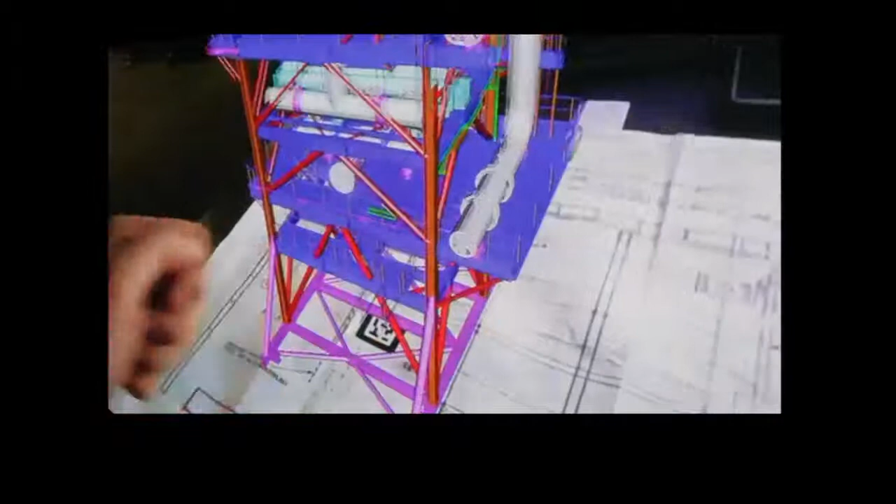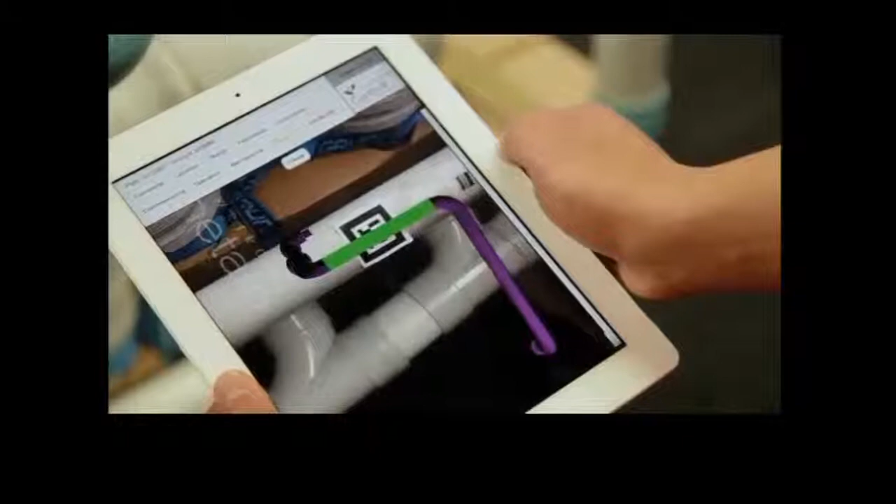It's difficult to conceive the scale and complexity of construction projects in the oil and gas sector. The challenges involved in managing such mega projects are enormous. Initiated by Woodside, Project EXPO uses leading-edge technology to improve productivity and performance in LNG construction. Internationally recognized leader in augmented reality, Professor Xiangyu Wang and his team Lei Ho, Matthew Lavender and Ying Wang have focused on getting the right information to the right people at the right time to enable significant productivity gains. Using augmented reality as an enabling platform, they developed a suite of powerful integrated software tools aimed at improving efficiencies at every stage of a project's life cycle. Their tabletop modelling tool overlays a 3D model of a structure onto standard 2D shop drawing plans. Moving the camera allows you to move in, out and around the model. You can also scale the model up to life size and even isolate layers of the structure. Simply by scanning a marker on a component, the In Situ Asset Management tool displays a 3D model of the component and where it fits in the construction path. Depending on your role, you can also access additional information, including specifications, where it was made, when it was delivered, and when it was to be installed. The tool can also locate components by identifying where you are and where the object is in relation to you.

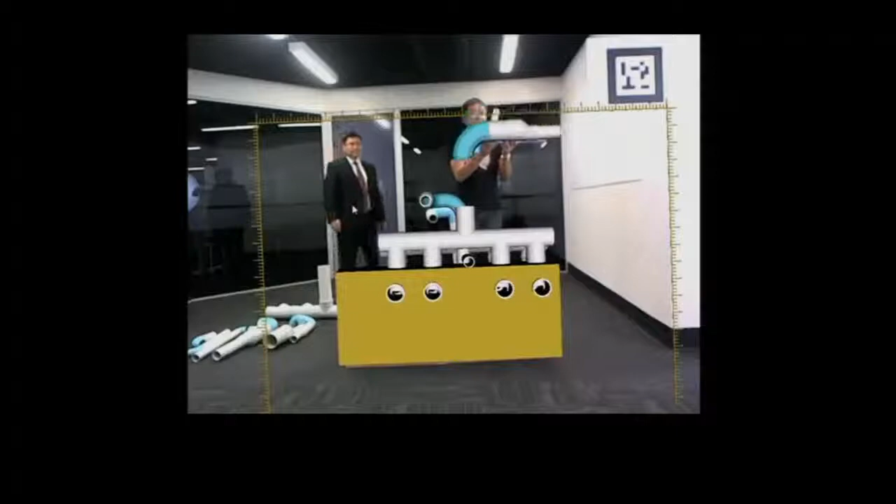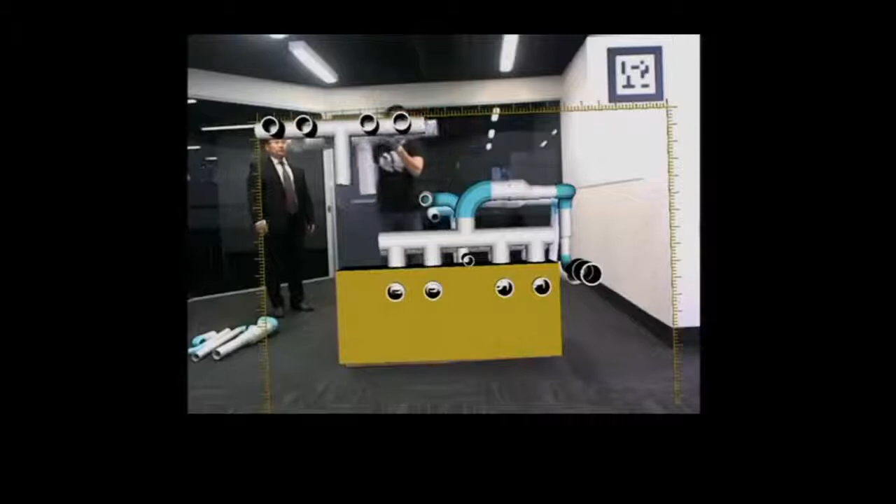The assembly tool locates you in a physical space and then overlays a 3D model of what needs to be assembled in that space. It shows what the component looks like and where it goes, and provides a step-by-step animation of the exact assembly sequence. This tool directly links the virtual world to the real world.

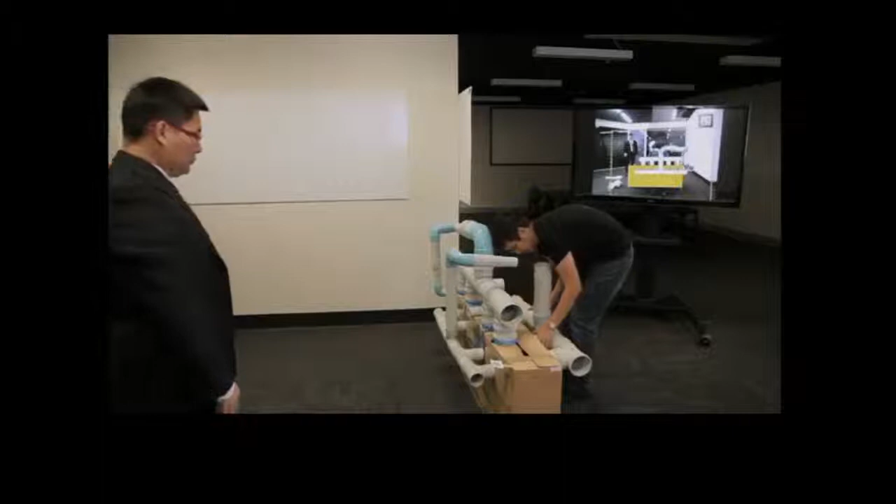Our innovation takes context-aware computing to the next level. Although developed with Woodside for the oil and gas sector, our innovation can be readily applied to mega projects in other sectors such as mining, health and transport infrastructure.

As you can see, we are actually doing a lot of significant research with Woodside and other industry organizations. But for confidentiality reasons, I cannot go beyond what is shown in this video.

But there's a series of papers which is going to be published soon, from where you can actually learn more about that. And I would like to spend a couple of minutes to introduce the Australasian Joint Research Centre for BIM. It's actually a research centre owned by university, established relatively recently.

This is a university research center, so it's different from industry organization sponsored, just like aceBIM - totally different visions. We are more working on the research part of it.

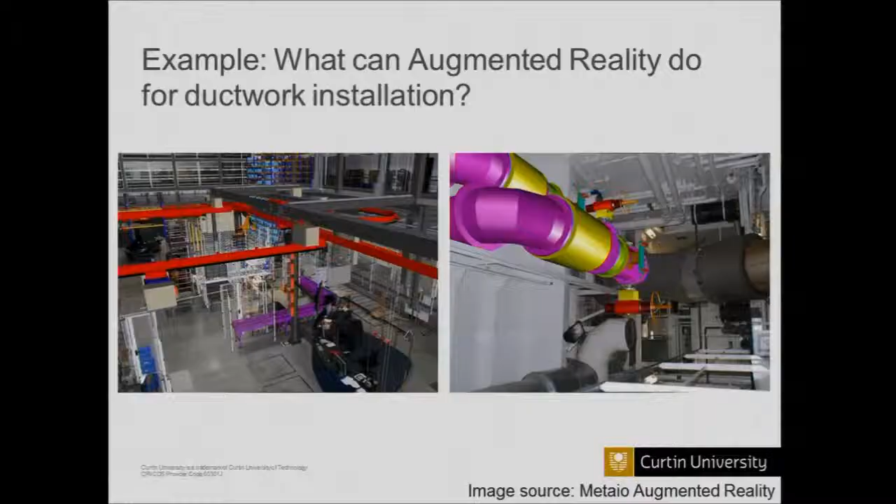But what if we use augmented reality? Then you end up with something like this. You get an overview of the factory and impose the virtual piping and other elements onto it. From here you can see the first-person perspective - the piping will be the same size, orientation, materials and textures as what you need to build. Basically, what you see is what you need to build, and you don't have to go back to 2D menus, 2D drawings, or 3D models anymore. This becomes a paperless setup.

Here's another example, which I don't think has been realized yet - it's called the augmented window. It's more like an iPad-based device, though it's not actually an iPad, it's still under development. Through this you can see information - for example, whether somebody on the 8th floor is in the office at the moment or not.

I'd like to bring this up again - visualization is key, but user-friendliness is very important. Look at why the iPad and iPhone are so popular - because of haptic touch. Flipping through pictures and photos is very easy compared to selecting a bunch of pictures in a browser-based environment.

The same idea applies here - we're trying to see how BIM can be categorized into different levels and delivered to the right persons through augmented reality and other visualization methods.

Augmented reality is just a way of presenting things, but behind the scenes you also need tracking and sensing technologies - for example, RFID, barcode, and GPS, that sort of thing.

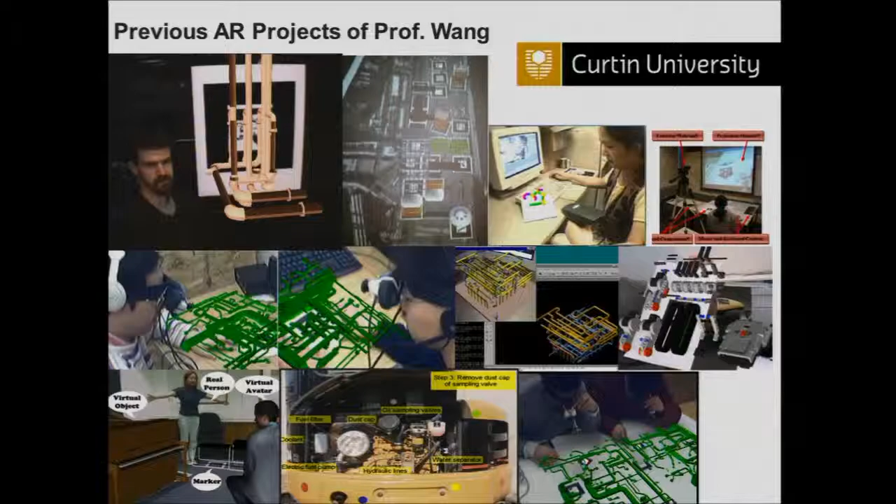Location awareness basically means how the location can be interpreted automatically, then indicated to the system, which responds accordingly - for example, presenting the right information to the right person.

It's all about interaction, integration, and interface. Interaction means how you communicate with computer, machine, and information. Integration means how you integrate the real environment with the virtual, how you integrate information with the workpiece you're dealing with - for example, a pipe or concrete slab. Interface is about how user-friendly your system is. No matter how fancy the technology, if it's not user-friendly enough, nobody's going to use it.

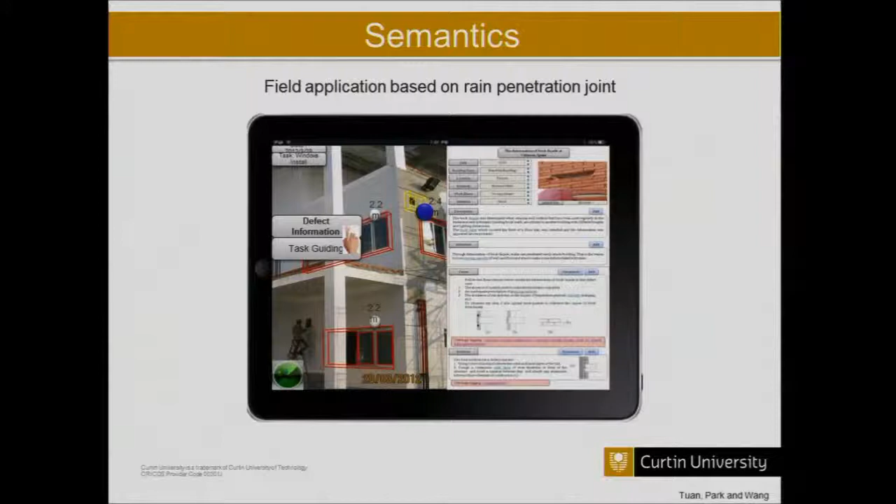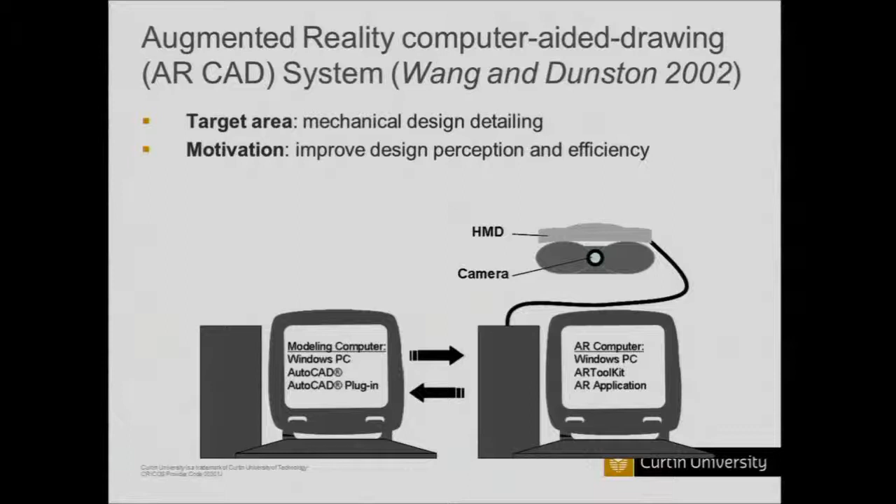This is one of the very early prototypes that I did with my PhD advisor, over 10 years ago now. This is about using augmented reality for what's called the AR-CAD system.

Basically you model things in AutoCAD, and then you click a button, and it will send it to augmented reality, so you can review the pipe in the augmented reality environment.

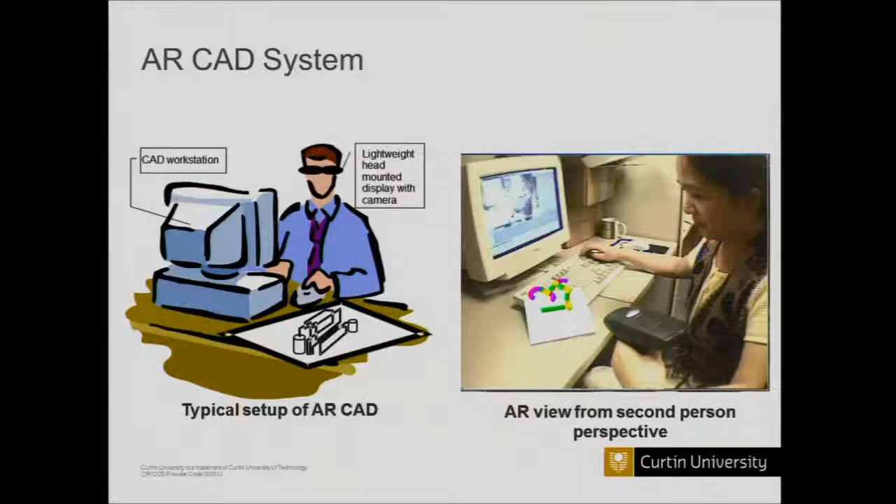Basically what this shows is, through the goggle glass, you can rotate the tracking marker, and there's a virtual pipe that looks like it's glued onto it, and then you rotate it 90 degrees, and the pipe rotates as well.

So you can examine the different angles of the pipe for design review purposes. And this is the AutoCAD environment sending it to augmented reality, so for a very complicated piping system, you can easily recognize and examine problems in it.

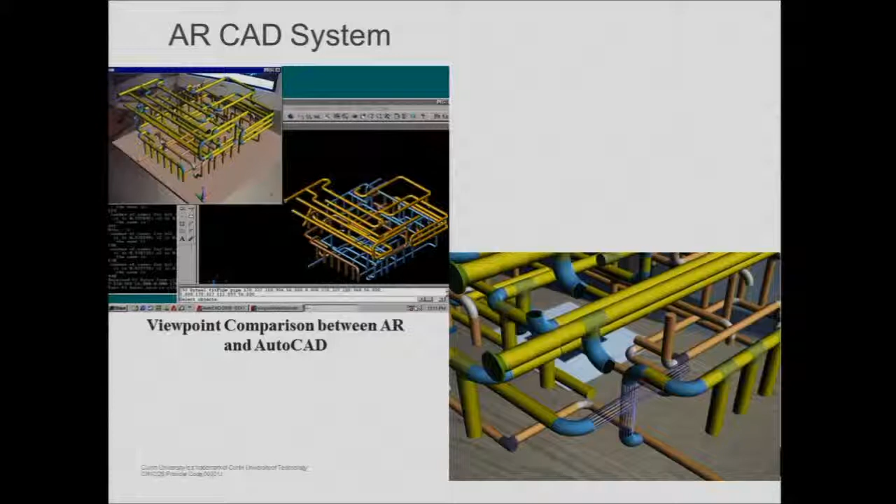I'm going to skip these technical details. We did an experiment comparing ARCAD with AutoCAD, and the conclusion is it's a very worthwhile viewer assistant tool to help identify interferences as compared to AutoCAD.

And then we thought about maybe we should bring ARCAD to the next level to support a face-to-face system for collaboration. This was back in 2005, looking at how AR can improve and change the way people collaborate in design review.

And this is the setup: two people wearing the goggles, and they can see the same complicated design, and they can collaboratively communicate with each other using this tracking ball, and find design errors.

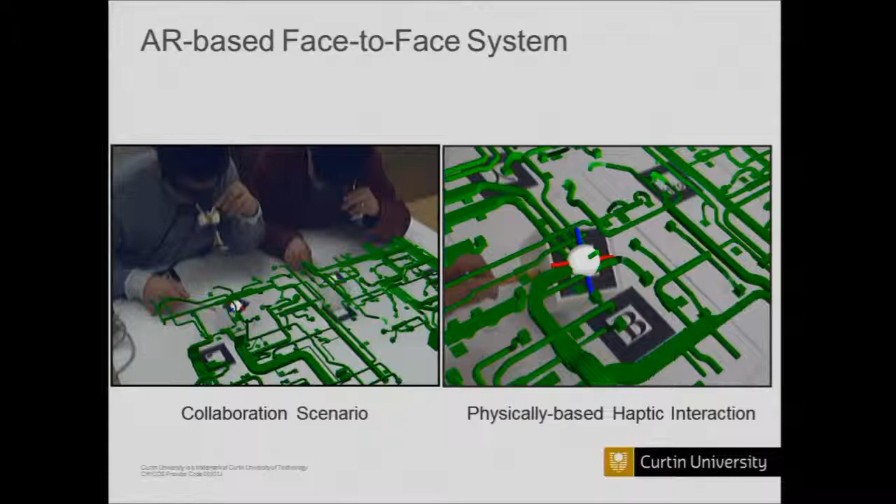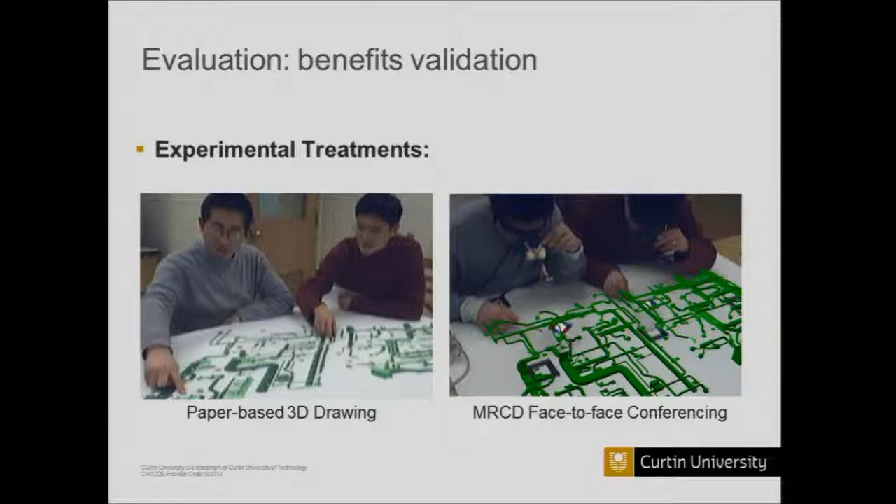And then we did an experiment to compare the paper-based 3D drawing, which was the state of the art at that moment, with the AR, and we found the benefits. The paper drawing consumed much more time than the AR would, and the finding of the difference is significant.

And we also looked at the NASA task workload rating index to look at how user-friendly the AR system is, and it turns out to be very user-friendly.

Some questionnaires were done, concluding that the AR system can overall better facilitate design, collaboration, and problem solving. For this particular experiment, 64% of time was saved as compared to face-to-face paper drawing tracking.

And then the next step from there was to take AR to the distributed collaboration level, to look at how people in two different geographical locations can collaborate.

And this is the AR setup, and we chose the NavisWorks as the benchmark for comparison. And then we found augmented reality can take much less time as compared to the NavisWorks in design review.

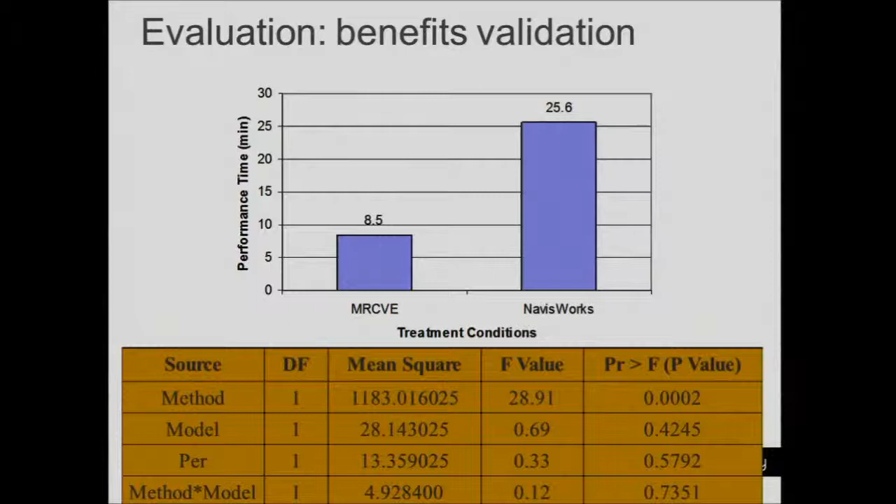Remotely in collaboration, and again, this is the NASA task load index. There were significant differences in the workload between the virtual space scenario and the NavisWorks arena, and we found it's much more user-friendly in this case.

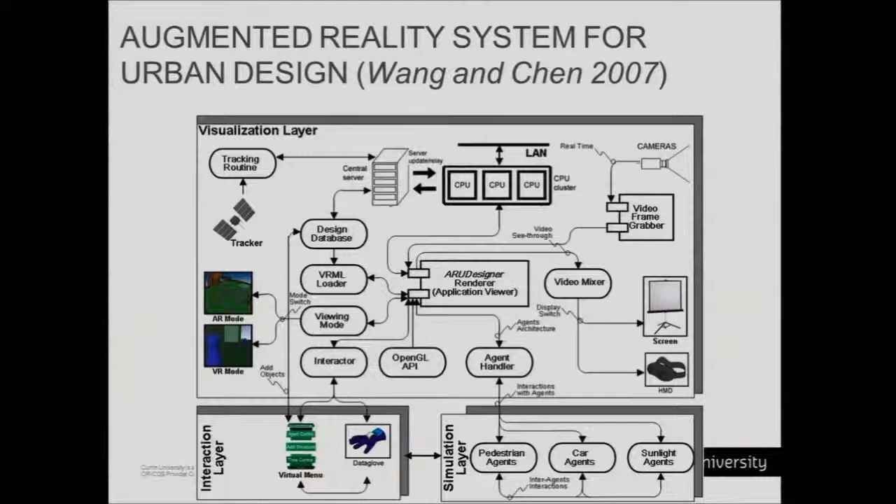This is another example we've done using augmented reality for urban design, urban planning, and education. For the interest of time, I won't go through the entire architecture. This is what we see on top of a map - you can put many virtual objects on it, some representing buildings, some representing streets or lawns.

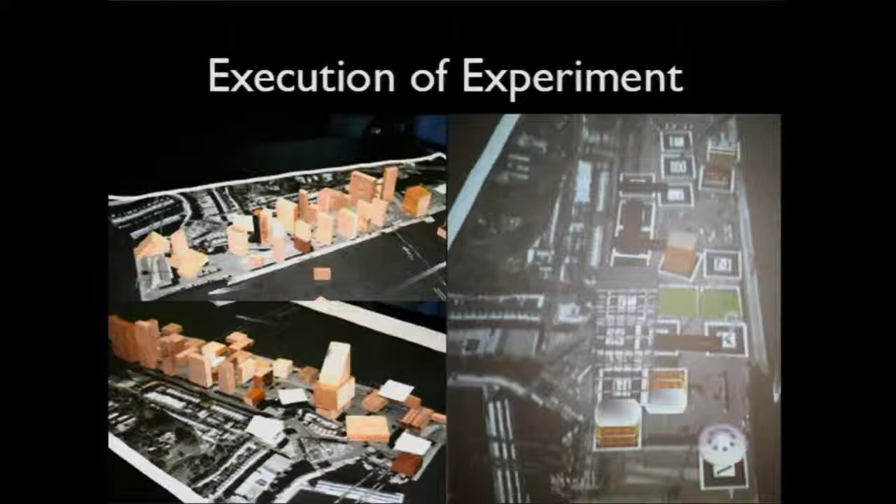We did an experiment to compare it with wood block systems. We asked people to realize some design objectives using these two treatments - for example, using the tool to provide a point of interest for pedestrians and tourists, or provide adaptability for future redevelopment. We gave them tasks to see how many objectives they could finish using either treatment within a specific time frame.

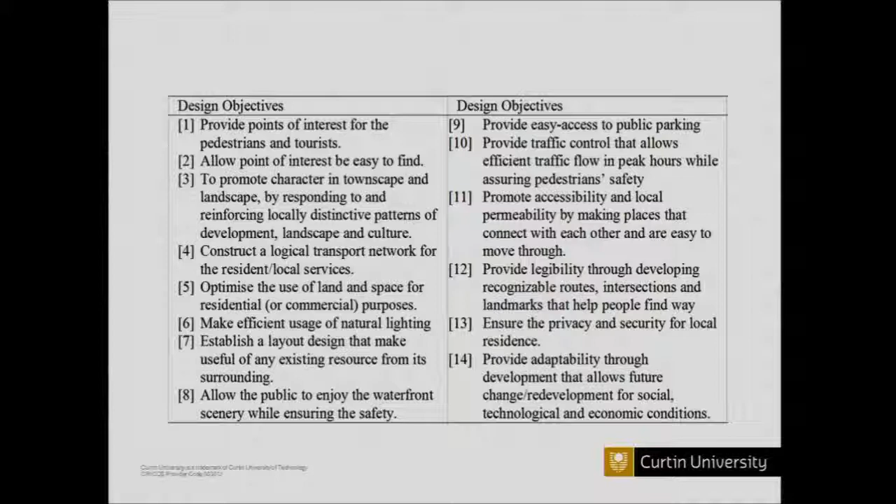We found there's not much difference between the two actually. If you look at group 1 and group 2, the number of objectives they realized is pretty close to each other. So some conclusions: AR is still very promising because it's an easy to use system, and it can reduce the possibility of misinterpretation among design team members. Our suggestion is to mix it with wood block use, and also use it as a distant collaboration tool.

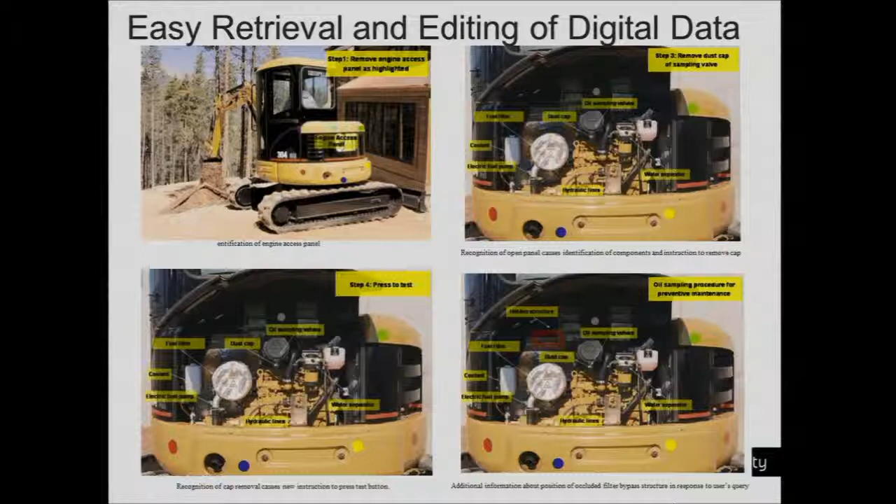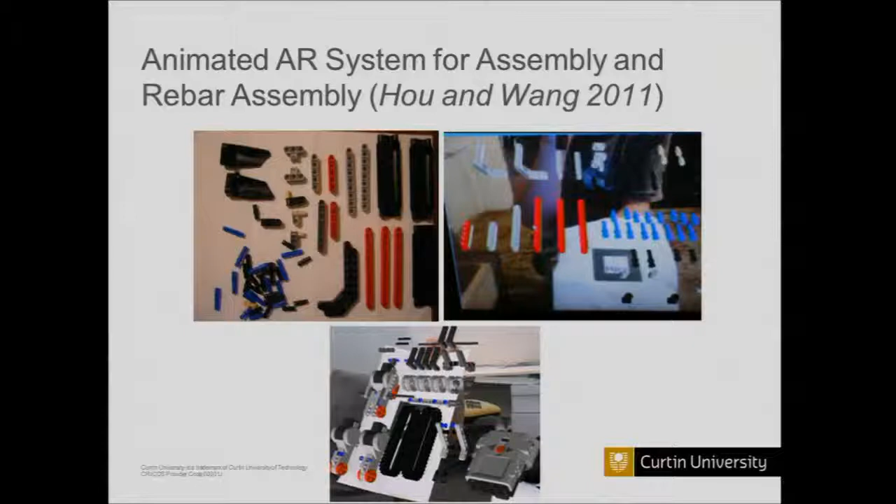This is a recent study looking at how augmented reality can support assembly with the Lego system. This is the typical assembly scenario - the human operator reads the drawings or manual, goes to each work piece, picks them up, and puts them together in the assembly area.

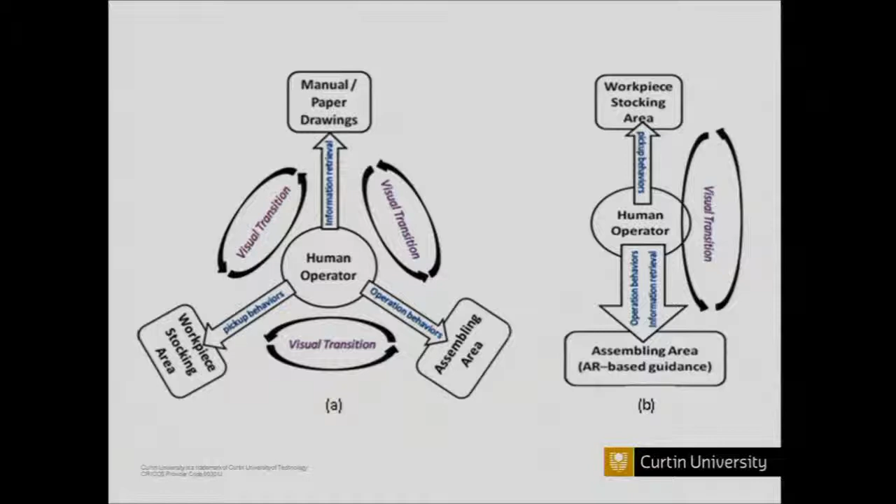Through augmented reality, what we can do, shown on the right picture, is integrate it all together to streamline the number of transitions needed to split your attention between different perceptual environments. From here, if I need to find a piece like this, I can just pick one and compare it - this is in augmented reality, this is in real. This means it's correct; this is wrong because the shape of the component is different. For these two examples, this one is wrong because it's shorter than what you're supposed to select. Then an animation can be played, step by step, showing how the Lego pieces can be put together.

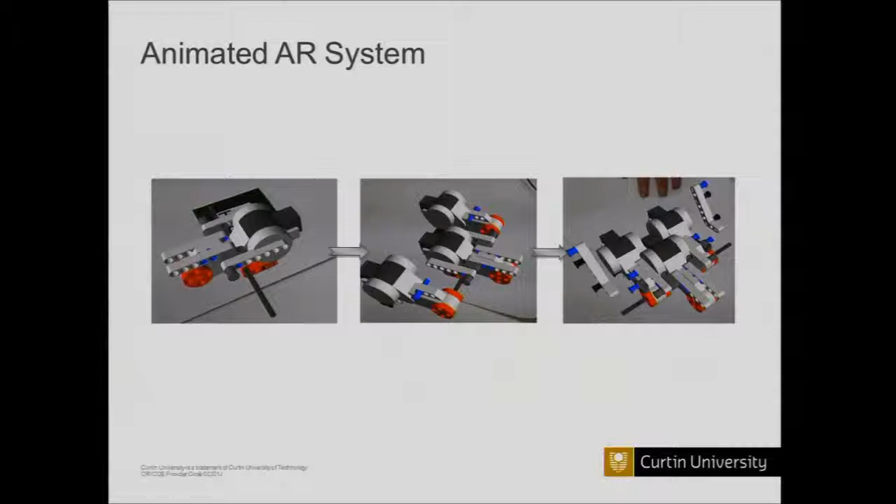This is the experimental setup, where we compared it with a 3D manual on the left and augmented reality on the right-hand side. We found augmented reality reduces a lot of time compared to the manual - it's around 7 minutes versus 12 minutes, almost half. The number of errors made during assembly is also significantly lower, 1.3 compared to 3.4.

We also looked at the learning curve to see how augmented reality can help people pick up assembly quickly. The learning curve is much steeper using augmented reality compared to the manual.

And this is another recent experiment we have done. We cannot afford the real pipe for assembly, so we go to Bunnings, which is probably relevant or equivalent to Home Depot here. Maybe we get the cheap pipes and put them together.

And this box is supposed to represent a heat exchanger in a liquefied natural gas plant. We got all the drawings from Woodside, the industry partner. And the assembly sequence knowledge was also borrowed from the industry experts.

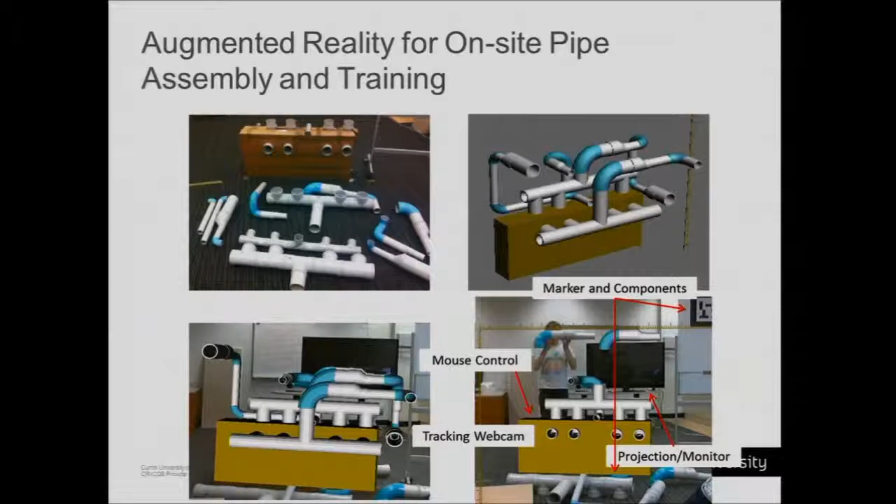So I want to play this video to show you the sequence. So the setup here is very simple. You see - oops, sorry, go back here again. Can you play again, please? Yeah.

So basically, these two people are looking at a large screen or projection screen on site, and something you cannot see here, but they can actually see augmented reality in front of them. And this one is the virtual one, which we'll start with.

There's a bunch of pipes around here, and we don't know which one we should choose and which one should choose first. But the augmented reality will let you know. So it will pop up with the first component, which is a T-pipe, and then you just follow the animation.

Because there are three main mistakes in assembly. The first one is you cannot always choose the right pipe or component. The second one is your assembly path is wrong or not clear. And the last one is your assembly sequence is wrong - you put the wrong thing on before you put the right thing on, so you have to remove it first and then put it on. So rework cost is a lot.

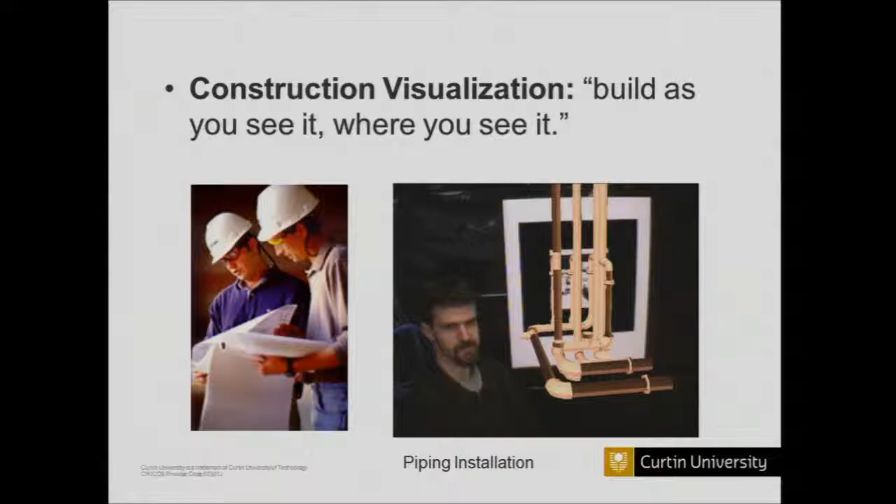Towards the end of the presentation, I want to go through a couple of slides representing some recent work, or milestone work, by my colleagues around the world in the same areas. One of these is by Azuma, 2001. So basically, if you want to build a pipe like this, you can just visualize it on top of the existing infrastructure.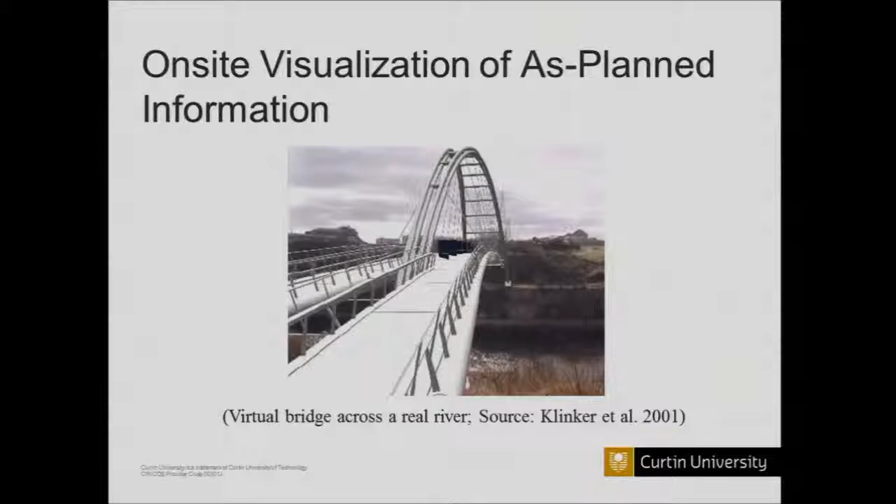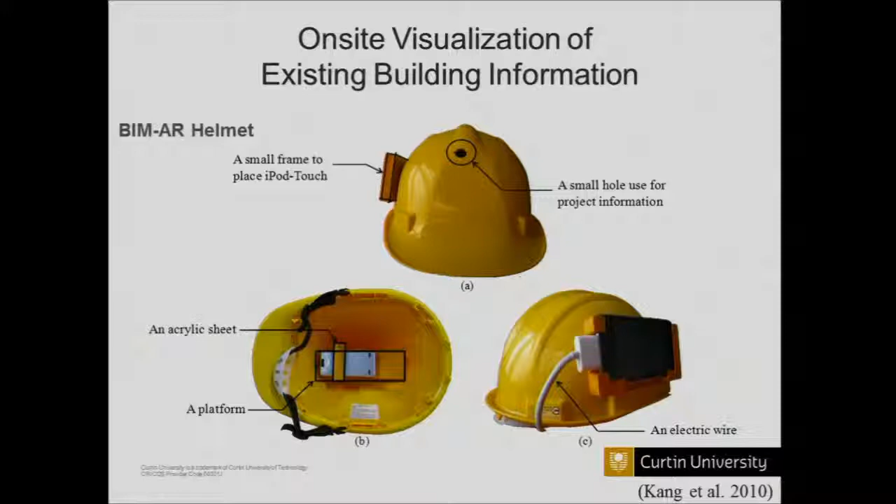I showed this example before already. This recent development from National Taiwan University is called the BIM AR helmet. They put a cell phone on the side of the helmet and linked it with a projector in the front as well. So what you see is actually something like this.

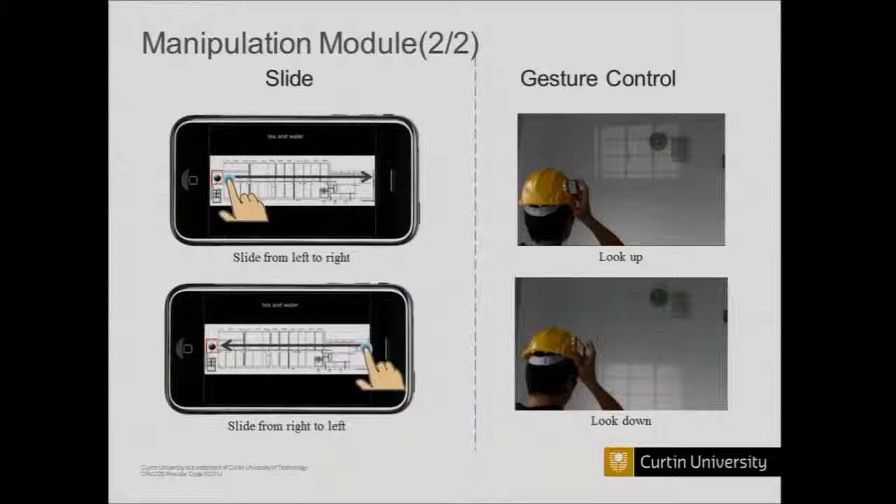You can see the reinforced steel behind the walls, which is projected from the projector in front of the helmet. Before you do that, you can actually choose which room you're in, and the system can bring up the drawings for you automatically. This is the indoor visualization, showing how facilities can be visualized behind the wall, so that if you want to check particular wiring behind the wall, you can make sure you're digging in the right place and find it out.

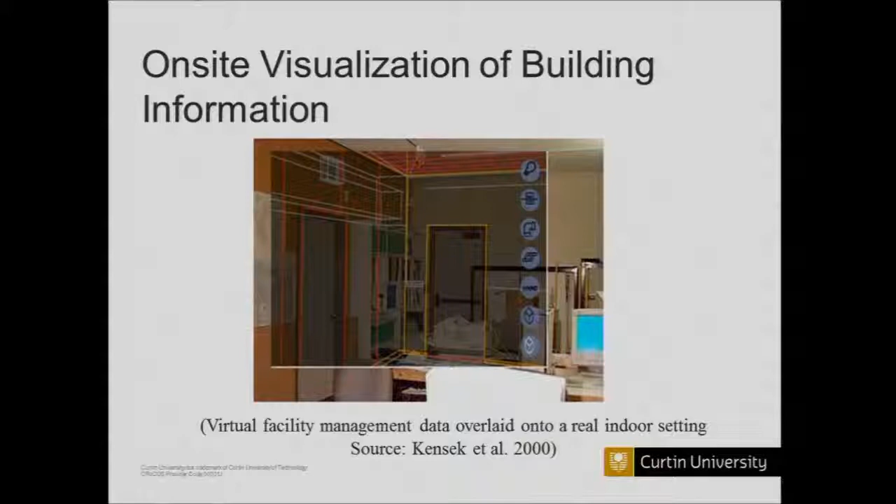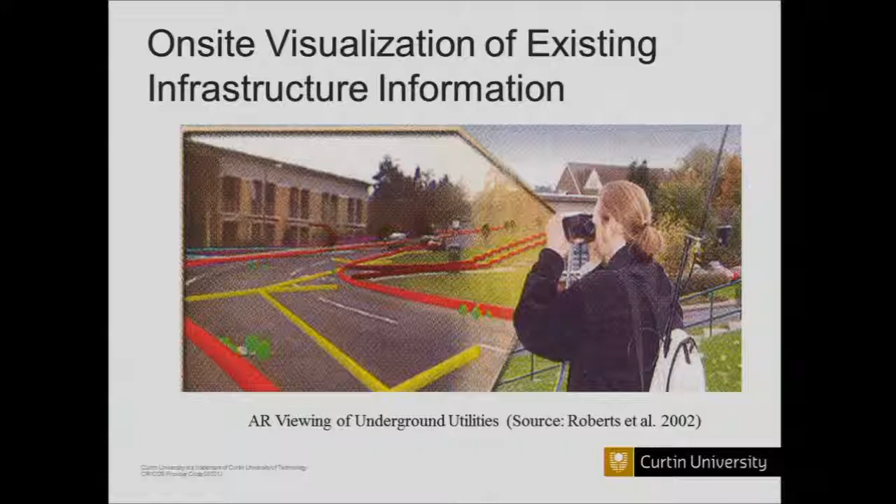And this one is underground sewage piping visualization through augmented reality, GPS-based. You can see the GPS antenna. If I find a problem in the sewage pipe coming out from this building, I can easily recognize which one it is, and then dig accordingly.

And this is the project from Professor Feniosky Peña-Mora in Columbia University, using augmented reality to track the progress of components - behind schedule or ahead of schedule. The red one means behind schedule, and the green one means ahead of schedule or on time.

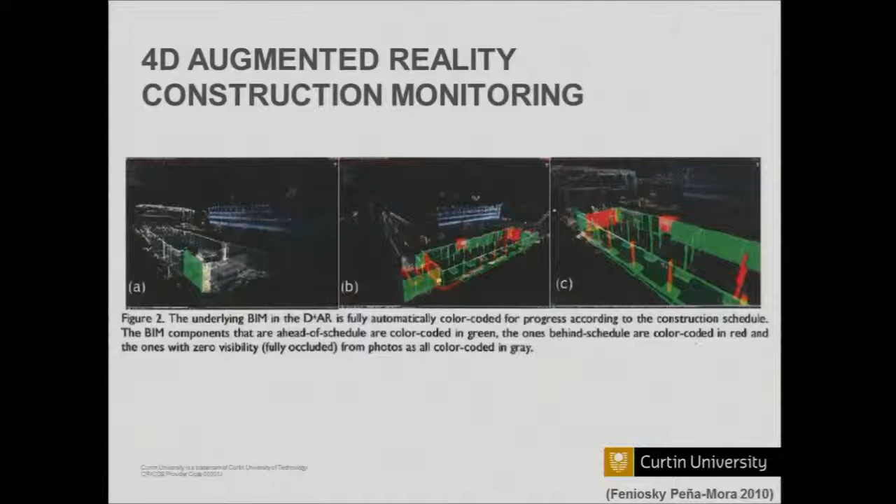So some quick summary: the hardcore engineering is very crucial and important - the engineering design, that sort of thing. But the way that people and workers use or interact with that engineering information is also very important. A poor, user-unfriendly integrated system is a waste of resources, while a good one can save a lot of money and time, and add a lot of value. And the technology is all there.

It just needs a smart way to integrate them all together, by consulting with industry people, testing it, and scaling it up to be implemented and used in the industry. AR must go to the site, and BIM has to go to the site as well, and there needs to be social and contextual awareness in the future so that it can reach its full potential.